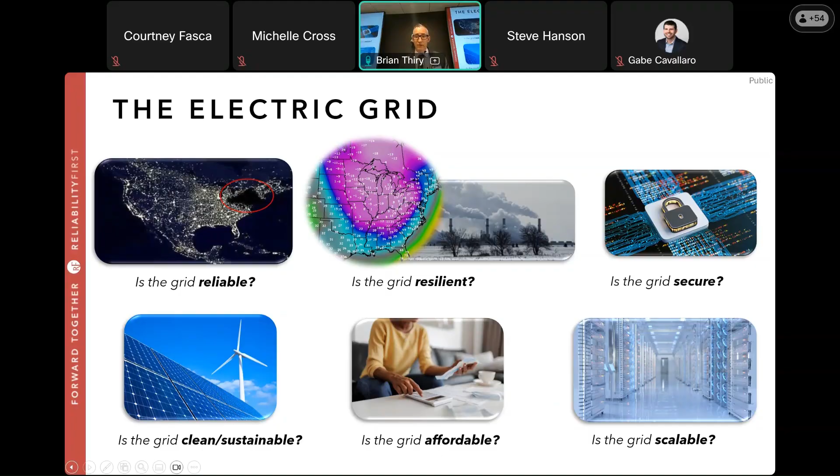The challenge we're facing - it's a lot of fun at dinner parties. Now I like to think that I am fun at dinner parties. People do like to talk shop about all these issues. You see it on TV, you see it in the news. Electric policy is at the heart of all of these things.

So that's my story, so let's get into this. This is the ERO risk framework. We actually had to submit this to FERC - like, what do you do here at NERC? And yes, we audit and enforce reliability standards, and yes, we do outreach.

Ultimately, our job is to take risk off the system, especially unnecessary risks. I mean, if UFOs invade and there's outer space aliens, I can't take that risk off the system, but there's a lot of risks we can take off the system.

So let's start at the top of this wheel: risk identification and validation. We are always monitoring and looking for risks, really through Diane's engineering department. She has two departments: one is event analysis and situational awareness, and the other is Johnny's engineering department, which you'll hear from later today.

You'll hear the word assessment a million times. Assessments are studies. Johnny is looking at what the grid looks like 5 years from now, 10 years from now. What if it's a cold day? What if it's a hot day? What if there's data centers? What if there's not data centers? What if everyone has an EV? We're running these assessments and studies, and those result in maps and studies so we can look at the risks of the future.

Also, our event analysis and situational awareness is looking at events—here in this country, overseas, internationally—so that we can learn from these things. Just by show of hands, have you heard of an event called the Iberian Peninsula Blackout?

Unfortunately, before then, I didn't know what an Iberian Peninsula was. I'm like, what is an Iberian Peninsula? Like, you mean Spain and Portugal? I'd heard of Spain and Portugal, but I didn't know of an Iberian Peninsula.

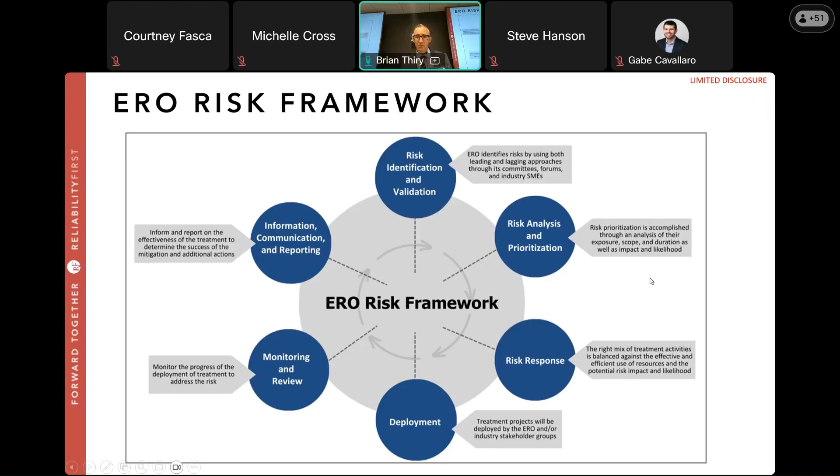Just as a heads up, if you're ever curious about what NERC and the regions do, there's this book called The NERC Rules of Procedure. It's a great book to read. It's only like 2,000 pages, right Kristen? Actually, I think I looked it up recently - I think it's 473 pages.

But it's all the things that NERC delegates to the regions. Like Michelle said, there's 6 of us regions. It's how we do our audits. Section 800 is how Johnny does his studies and assessments - these engineering studies we have to do. It's also how and when and why we analyze events. You see section 807, analysis of major events. And then section 1000 is about our situational awareness. Our situational awareness is really interesting.

We have some proprietary tools. I don't want to call them secret tools, but we have some tools that we could keep an eye on the grid, what's happening, regarding events on the system. And there's also a lot of really great open source tools that anyone can use.

If you don't already have it, download the PJM app, download the MISO app. You can go on real time, you can see what their reserves are, you can see what their interties are. There's really cool stuff - there's a thing called FNET, GridEye, shows the frequency all day, every day. Even things like social media feeds - you hear about events, you might be scrolling through X and say, oh, there's a blackout in Cuba, we should look into that. So a lot of really great open source tools, plus we have some proprietary stuff that gives us insights of what's happening in our footprint.

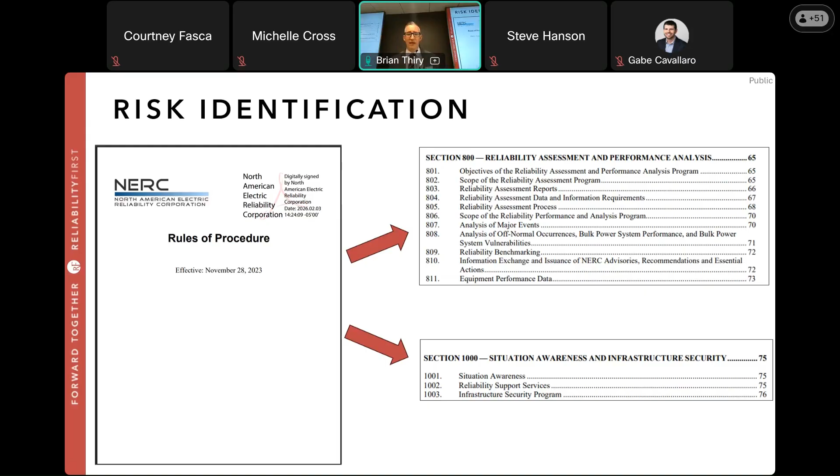So this is a Brian definition - you won't see this in any NERC literature. I call it 3 events: the lowercase e events, the capital E events, and capital EVENTS, like the stuff that you will read about in the news. Like I said, this is the unofficial Brian definition.

So lowercase events - just coming from a control room environment at First Energy, things happen all day, every day. Lines trip, whether it's a squirrel, whether it's a relay, whether it's an equipment failure, lightning, a car pole accident - things happen, these are little events. It's like you're playing Jenga, you pull the puzzle piece out, the thing don't fall. You don't want to pull the thing out because it might fall, but little events happen all day, every day.

We capture these things, we have all sorts of information. You might hear the word XADs - you're like, what is XADs? It's transmission data, generation data, misoperation data - hundreds and hundreds of events that come to us that we collect data on, like how reliable is that 138 kV line? How many times did it trip out last year? Why did it trip out? Was it vegetation related? Was it squirrel? Was it lightning? Was it unknown? Was it relaying? Was it an equipment failure? So these are the little events that happen all the time, all day, every day.

Not good, but these things happen. And guess what, for the most part the lights stay on. A generator trips, the lights stay on. The system is resilient to withstand these lowercase e events. We'll see how resilient it is coming up in the future with all the red that Michelle showed on the map, but right now we can withstand these lowercase e events. A lot of the data we collect there.

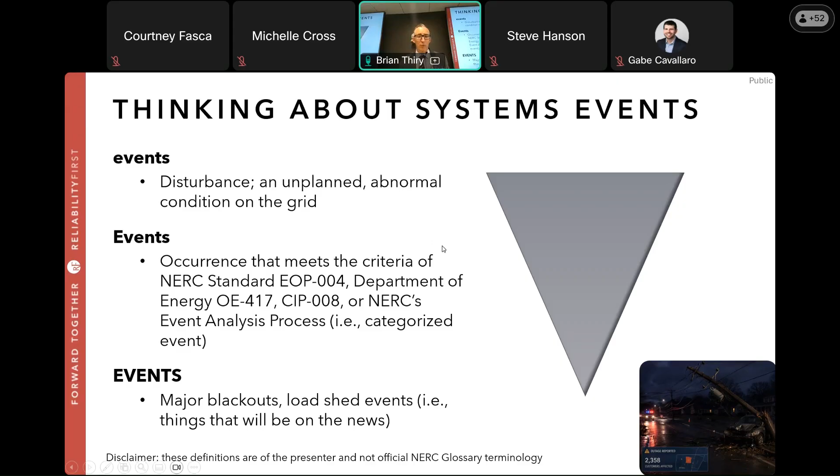And as we see our margins getting thinner and thinner, these things become more and more concerning. If you're interested in this kind of stuff, you go data. And I go, me too, I love that kind of stuff. Check out our State of Reliability Report. NERC releases this report every year, it's called the State of Reliability Report. It has every statistic you could possibly imagine.

So if you say, well, what are the trends, TADS, GADS, MIDAS, all these numbers, all these lowercase e events, are things going up or down? How many loss of load events did we have? How many EEAs did we have? All these types of things. The State of Reliability Report is a wonderful report. It has all the statistics of how we're doing, and it has it by interconnect. Here's how it's going in the Western interconnect, the Eastern interconnect, in our region.

Also, like I said, our impact report has specifically to the RF region, how many violations did Kristen have to process? How many late nights did she have with those 500 violations? 85% of them being self-reported, right, Kristen? Yes. How many events did we have in ReliabilityFirst last year?

We had 62 events, those were 62 reportable events. They could range everything from someone broke into a substation and stole copper, which happens, that actually mess up relaying. That's a reliability concern, along with, we don't like people stealing our copper. Also the severe misoperations, the EMS SCADA events, all those things we talked about today.

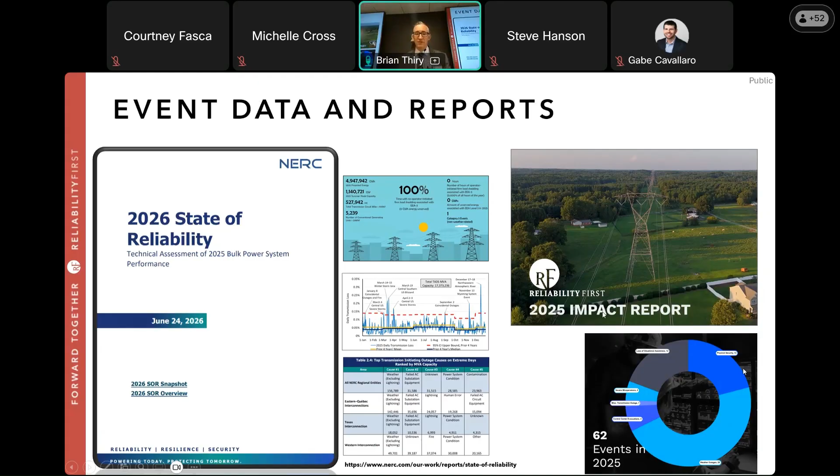So if you want to dig into the numbers and data, it's all there. These are things that we share with you at aggregate. So here's some of the big capital E events, and what do we...

Tree trimming, big deal. EMS SCADA outage is a big deal. Zone 3 relaying, mandatory standards, all the things we know and love today. We did all right for a little bit. We call it the golden era of reliability, maybe.

2011, then the Southwest outage reinforced the need for day-ahead studies. This was like my main job back at First Energy, running day-ahead studies of, dear Brian, based on what we know, how do we think the grid's going to do tomorrow? Based on what lines I have out, maybe for maintenance, maybe they're planned outages, what generation do I have available, based on what I think the weather's going to be, what the load's going to be.

Based on everything I know, how do I think the grid is going to perform tomorrow? Do I see any challenges? And if I see challenges, let's solve it today so that I'm not trying to solve it on the fly tomorrow. We saw a lack of day-ahead studies in that report that led to some real-time issues that were pretty much preventable.

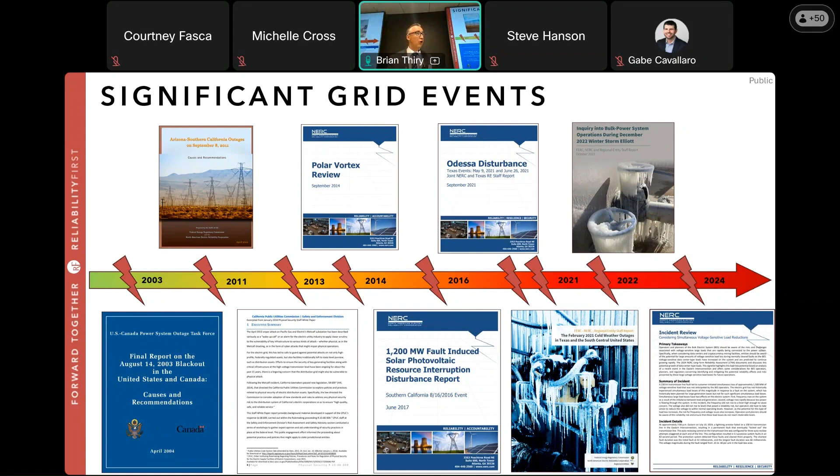So we are learning from these things. They are going to lead to new mandatory reliability standards. That's how we take this event information, and here's how we apply it into our work. Does that make sense? Yes, people are nodding - it's good.

Security events as well. We don't get too much into cyber and physical security today, but we could do a whole workshop on cyber and physical security. I already mentioned Stuxnet, operational stuff, and the Ukraine grid attack, but NotPetya - this was a supply chain thing. We were already...

Toilet paper on the shelf - our supply chain standard is like, what is the software in our stuff, or where are we getting our stuff from, and is it safe, and is it going to cause a security incident on the grid? Who are our vendors? Are our vendors vetted? All of those types of things. Are we getting things from countries that don't necessarily like us? And how do we know it doesn't have sensors in it and different things that we don't like? So that leads to supply chain standards. If you're familiar with the NERC standards, we would call that CIP 13.

SolarWinds - you guys remember this one? It wasn't that long ago. SolarWinds, we started figuring out they are in our systems. And we go, like, in my system? Like, I hope not - but they're in our systems. So now that leads to a new standard, it's called CIP 15, Internal Network Security Monitoring. Now there has to be a standard and guidelines for how we monitor what's in our system. What's our baseline? Did our baseline change? Is something in our system that we don't know and we don't like? And how do we get it out of there?

And then also from these security events, we learned from other infrastructures as well.

Colonial Pipeline ransomware, May 7th, 2021. It was a ransomware attack, and they didn't even attack the operational system, they attacked the IT system. But out of an abundance of caution, they shut down all the operational stuff because they didn't know how deep this ransomware attack went. So they shut down like 5,500 miles of pipeline. Once again, the lights stayed on, but these are things that are concerning. These are precursors, things that it's important we learn from and do things on.

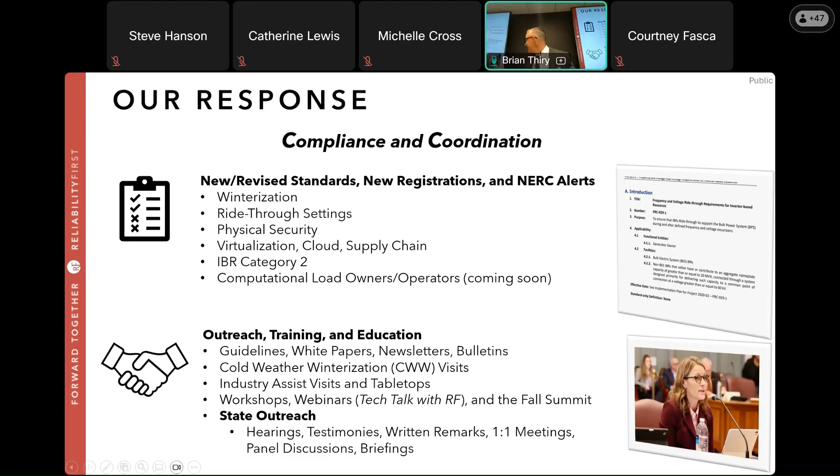Here's the bad news, though. We are entering high-risk times. Like I said, I wasn't very fun at dinner parties until recently. We're entering high-risk times, and we're starting to see precursors. It's like having little mini heart problems before the stroke - these are things we're very, very concerned about.

Michelle showed the map. The map is not a prediction - I sure hope it's not a prediction. I don't want to go back to caveman times. I'm not much of a hunter-gatherer. I'm much more of an email type person.

We're looking at things like energy emergency alerts in hours by region. Top left is PJM. You could pull these numbers yourself - they have a dashboard that shows when they're in these energy emergency alerts. We're seeing more and more hours in these energy emergency alerts.

My dumb analogy is like, I take my kids to the Grand Canyon and say, this is beautiful, you should see this. You should also stay away from the edge. How many hours did we spend on the edge? Hopefully very few. We don't like to live on the edge. We would like to see those numbers go down, not up.

In the State of Reliability report, they have this map called the one billion dollar weather and climate disasters. We are seeing more extreme weather across the Midwest and Mid-Atlantic, the wildfires, the extreme cold, the negative 20s. They said there's an El Nino coming. I feel like it's an SNL skit or something, but no, these things are very serious.

These things cause a lot of damage on our grid. Our grid is mostly outside. The natural gas industry has a lot of their stuff buried, but a lot of our stuff is out in the open on poles and towers, susceptible to weather. We had the Baltimore event, and we had a report on that. I could do a whole presentation on that.

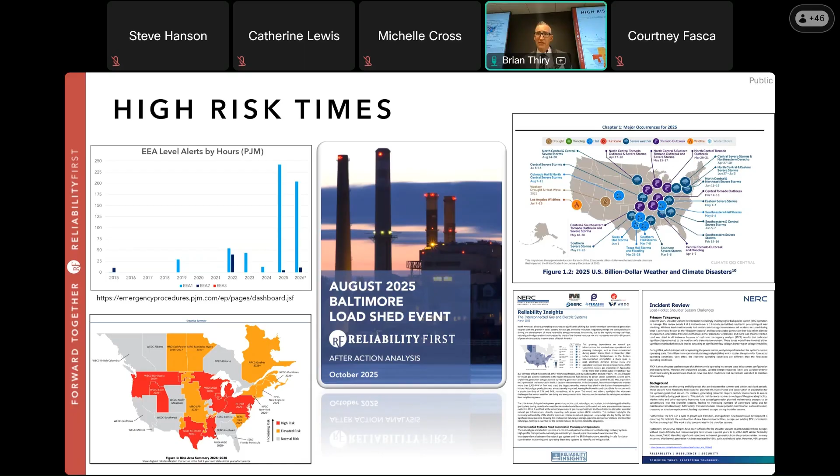So high-risk times, our work has never been more important, and most importantly, our collaboration with industry and policymakers has never been more important. So enough of me talking.

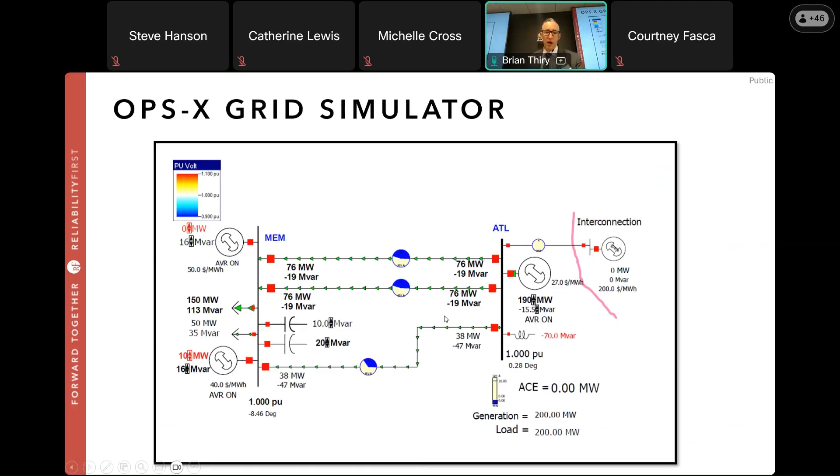We're going to have some fun. Listening to me talk is not fun, but we're going to go into the control room, metaphorically of course, and we're going to do what's called an OPS-X simulator. So give me one second, let me pull this up.

So we are in the control room. This is a very, very small mini grid, not the Eastern Interconnect by any means. But we are going to go into a control room and see, well, how does this work if you are the operator on the desk?

So first, if you've seen this before, I apologize, maybe you've seen it earlier at lunch, but you're in for a treat. Let's just do some orientation about what we're even looking at, because we didn't go through a month of training in the PJM training and NERC certification training. We are all now operators on the fly.

So the Eastern Balancing Authority, that is our grid connected to the rest of the world. So the grids obviously are interconnected. If I am not balancing, the rest of the world will help me balance. So that's good, I'm connected to the rest of the world, except for the purposes of today's drill, I want to balance. I don't want emergency power from them, nor do I want to be sending down power. Today I don't have a contract with them. They're good for reliability, but probably not the most affordable thing to do.

All right, the spinning wishbones, what are these? These are three-phase generators, this is making power. For today's purposes, we're going to try to keep this as simple as possible. I can give a whole lecture on megavars and voltage and why that's important.

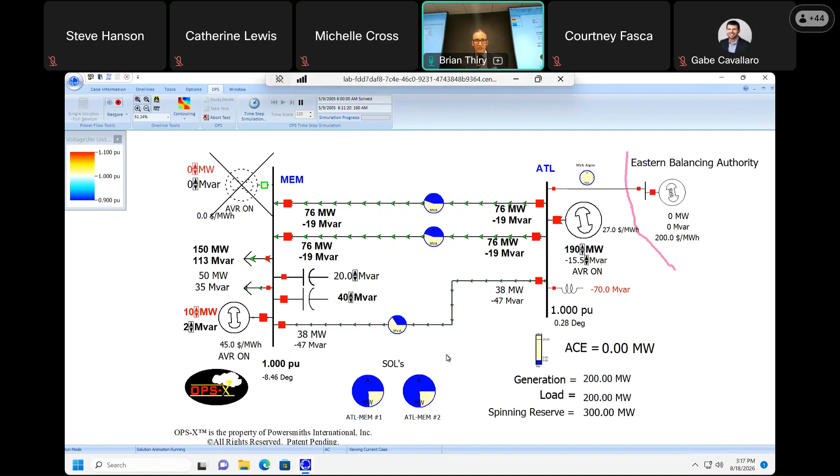I have a feeling Anne usually wakes up before 5 a.m., but today she slept in until 6:15. She wakes up and turns on her coffee machine. Oh my God, Diane, look, it went up from 150 to 162.

So my ACE is negative. Okay, easy peasy, I have a dispatchable generator, I'm going to ramp it up. I want to keep that ACE plus or minus 10. You see, I'm over-generating by about 3 megawatts. I have 215, I need 212. The extra 3 get absorbed by, call it the rest of the world. Keep that ACE plus or minus 10. I'm in pretty good shape.

So at 6:30, more people wake up. You know, it's kind of like me, I like to sleep in a little bit. Usually I'm up by 6:30.

Looks like it's going to be kind of boring. You're just going to click that up arrow. Yeah, you're right, just click this up arrow. We'll see what happens.

But you know, this isn't my first day on the desk, and I'm kind of thinking I've got a bad feeling about the day. In fact, I have such a bad feeling that at 7 o'clock something very bad's going to happen. I just don't know why. I can feel it in my bones, I can feel it, I'm just so nervous. I'm telling my boss, I just have a bad feeling about the day. My boss says, Brian, it's fine.

It's fine. All right, so 240, load's 237, everything's going okay so far. I'm using this nice cheap generator. Hey, if I lose a line, I'll go to 91%. That's okay, I'm fine there. My line's at about what? 53%. Okay, that's good. If I lose one, I go to 91%. All right, I'm doing all right.

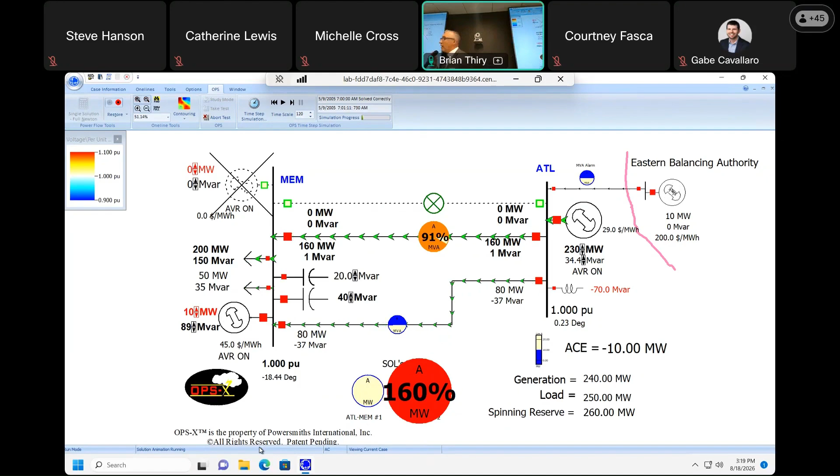Well, the operator doesn't know. All they hear is this noise in the control room. They go, uh-oh, they look up, they go, what happened? They get an alarm: I lost that number 1 line. I don't know, it looks nice outside. It could be lightning in the area, I guess. Was it a squirrel? Was it equipment failure?

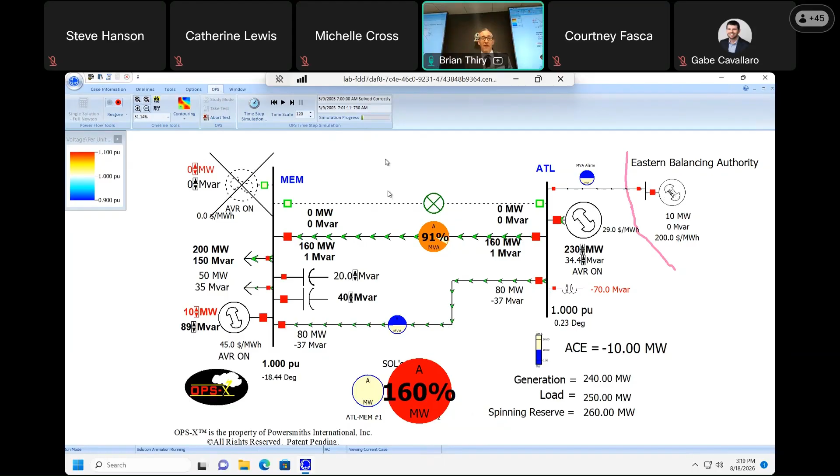I don't know, I will have to send out Michelle to go check on it. And I did pause it, just like I paused it. Michelle went out to the substation. I go, Michelle, what happened? She goes, oh Brian, it's nothing, I'll have it fixed in 45 minutes. Michelle, that is awesome - usually in my experience on the desk, it wasn't fixed in 45 minutes.

But Michelle's really good at her job, so she's going to get this fixed in 45 minutes. But for those 45 minutes, I have a headache. And here's my headache: line number 2 is at 91% - good, right, no worries. Line number 3 is at 50%, that's good. My ACE is at negative 10.

Okay, fine, I can ramp that up. Okay, my ACE is at 0, that's good. But my contingency is saying, hey Brian, listen, if you lose another line, the other line is going to be at 160%, which means it might come out of service. Then you might have a blackout. So that would be very, very bad.

So I can't live with that, because what are the chances I lose another line? I don't know, why did I lose the first line? If these two lines are near each other and it's squirrels, maybe there's this squirrel parade. Maybe those lines are near each other and there's lightning in that area. Or maybe we're under attack from someone who doesn't like us, or doesn't like me. So I don't know, I can't risk it, not even for 45 minutes.

I can't risk it, I've got to do something. So I've got to get that 160 down to less than 100. You guys have any thoughts of how I would do that? I mean, I could just shed the data center - some people might like that. But outside of shedding load, what do you think I should do?

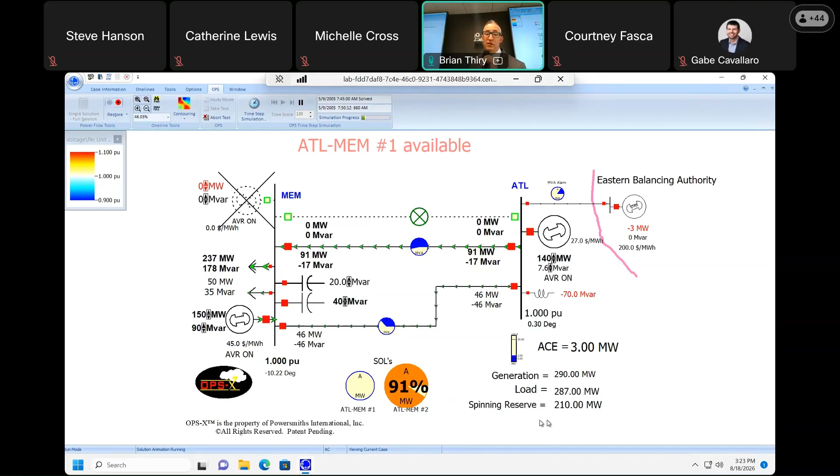Oh, it's available, Michelle's done. Michelle goes, Brian, you could have the line back. Good, I got the line back. Cool, I could actually start using this cheap generator again. So let me ramp up this cheap generator, I can ramp this one down a little bit. Let's go up to like 200. I can ramp this one down to 100. Hey, we're doing pretty good.

These lines are at 47%. If I lose a line, I'm at 80%. The system is reliable, it probably could squeeze a couple extra megawatts out of this one on the right, but just want to kind of play it safe today. It's already been a rough morning.

812. It's only going to get hotter throughout the day, so this load's going to go up. Remember, I said at 150, now we're over here. So you ramp this up a little bit.

All right, so my contingency is 85. My line right here is at 50%. Doing okay. Maybe today won't be so bad after all. What do you think, Diane?

Oh, I think it's really bad. Diane worked in the control room too. She knows a bad day when she sees them. She knows, there will be signs.

All right, so my contingency is 90%. I'm monitoring the system, I'm going to put on these cap banks a little bit more. I can do a whole lesson on voltage, but not today. You just don't have enough time.

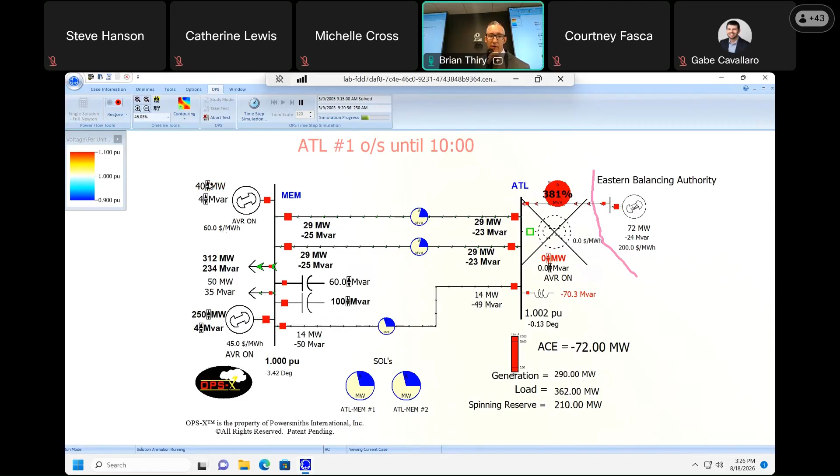I'm going to ramp this one up as high as I could go, up to 250. Don't go much higher than that. Let's start ramping this one up because my ACE is still negative 90. Oh boy, better click faster - I'm going to get that score because I'm clicking faster.

Oh boy, okay here we go. Expect this - ooh, I didn't. It's a little peaker today, a little expensive, $60, but here I am.

Hey, this unit's out too. Michelle is so good at fixing things. I mean, usually these units trip out - maybe it's a tube leak. It might be out for like 4 hours, or it could be out for 2 days. But Michelle goes, Brian, I got you. It's remarkable - I mean if you're on the desk, if Three Mile Island or Davis-Besse tripped out a nuclear power plant, that thing could be off for 2 weeks.

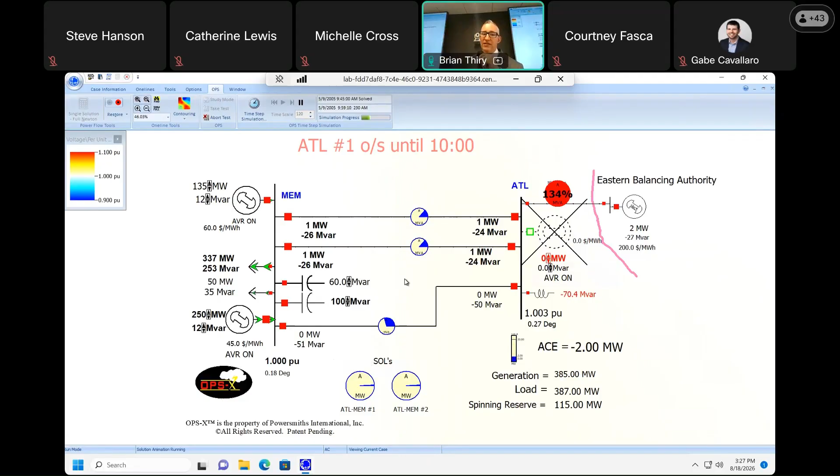You know what's funny though is that when that unit's off, I'm actually making power right by the load. All the power is very close to the load, so these lines don't have a lot of flow on them. That's actually kind of good reliability - having generation near the load. Yes, transmission is good to move power, but also we don't have a lot near the source.

So, all right, got the unit back online. Once again I got to rebalance the system. I can ramp this one up - let's try to do it the easy way, clicking the top. I just fire this up to 200 megawatts. Okay, now 5.

So we are back in business. We're using the cheap generator at - oh, it actually went up on me, these market prices - $29 now. The one on the bottom left, 45. I turned off the expensive one, so I'm back in business.

But let me talk a little bit for a second about spinning reserves. Spinning reserves are very, very important to system operators. These are essentially your online headroom on your generators.

So this generator is at 200. What does it go up to? You guys remember, 250, thank you. So how much headroom does it have? 50, yes, 250 minus 200. This one also goes up to 250, it's at 210, so I got 40 of headroom there. So right now I have 90 megawatts of spinning reserve - that's 90 megawatts of headroom.

These are really important things as system events happen, as generators trip offline - they have something up and running with some headroom. If these things were popped off, they wouldn't have any.

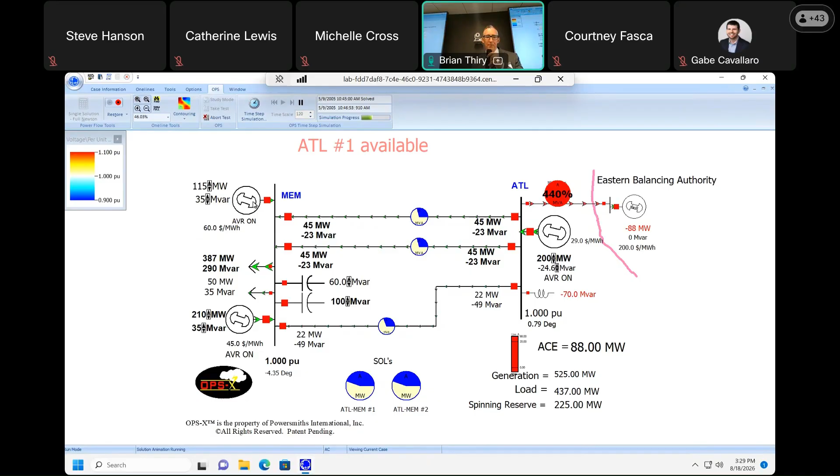Watch this - if I bring on this one, and let me just make this one the minimum. Give me a second here, I'm gonna get a bad score, I'm not clicking fast enough. Let me go to 10. If that's at 10, I just added 240 of headroom.

So now my spinning reserves are high. In the PJM world, they want to keep spinning reserves at 1.5 times their single largest contingency. So in this simulation, I think the scoring system wants me to keep my reserves at, I think, like 100.

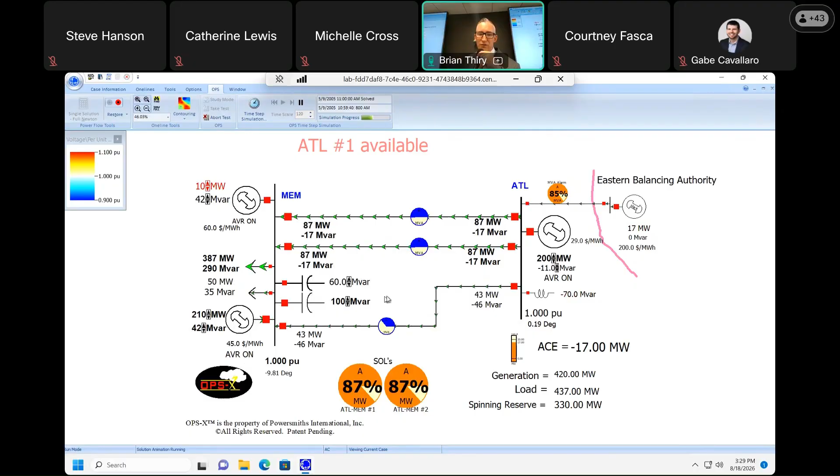Oh, what happened now? Uh-oh, I lost that natural gas generator. So I have to start ramping - let's try to do this the easy way. I'm under-generating by 185.

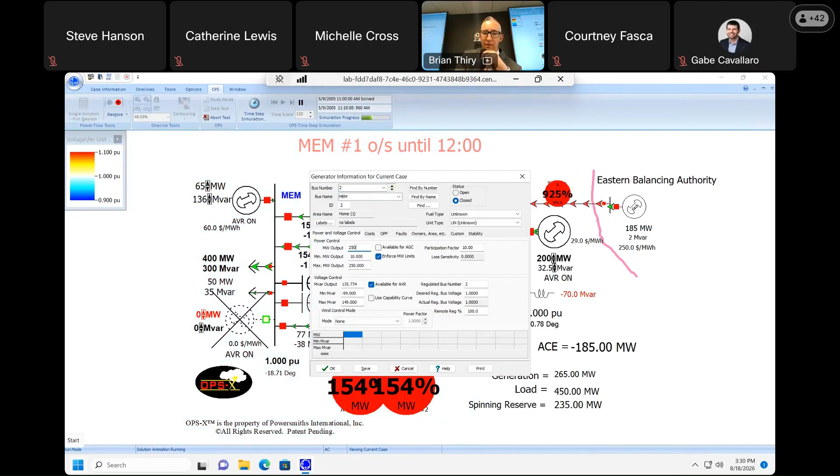$54.50, my ACE at 0. Not having a lot of room - I got 50 on my generator here at Atlanta. I have no headroom on my generator here at Memphis.

Luckily Michelle's on the case again, she says she could get this back to me by noon. But imagine if it was going to be out for 3 or 4 days - I'm in a very, very bad situation, I got very little reserves.

And at this point, other than just going negative on my ACE, there's no way to get more reserve. There's no other generators I can bring on. One trick I could do is I could shed load - I could say, hey, goodbye data center, you're out.

Then hence I'm over-generating, I can ramp this down and I can get my reserves up. I mean, that's what we call a rolling blackout or load shed, or maybe in some instances the data center has backup generation it can flip to. So that's a way I could get my reserves up.

But if I leave that on and I have to have this up at 250, I am really, really running out of reserves here, spinning reserves. So I'm at a very, very bad situation where if I lost another unit, I'm talking about rolling blackouts.

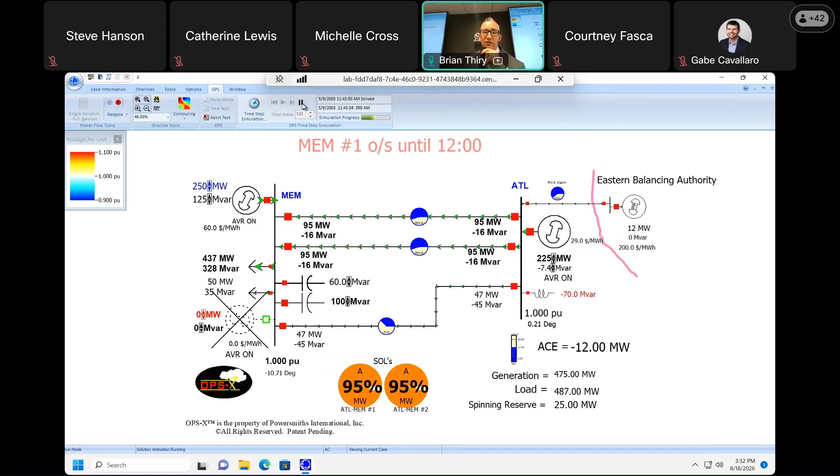So essentially, you could play out this OPS-X scenario all the way to 6 p.m. The load will go up. You've already gone up 150 to 437. I think by the end of the day, it's at like...

But you see as things happen, how the operators respond and react. So that's why as we integrate data centers, IBRs, generators, we get all these risks. I think someone, either Diane or Michelle, said at the beginning, it's really like that combination of all these risks together, how it plays out in real life.

So we talk about, like, I'm looking at all these tools and my dispatching and my ACE. What if my EMS wasn't working that day? What if I didn't know I was blind and I couldn't respond and react to these problems? You can see how these risks could really, really compound and cause reliability challenges on the system.

So the OPS-X simulator is a lot of fun. If you ever want to try it out, let me know. I could let you play. We can see what your score is, and if you can beat my high score.

But at least I hope this shows you a couple of things about what is a dispatchable resource, and then just some of the challenges we have. Like, suppose we said, hey, that oil peaker in the top left corner, we want to retire that. We have a renewable mandate and we want to replace that with solar, wind, and battery.

Well, how does that work in an operating environment? Or suppose we want to add an SMR, or suppose we want to have a nuclear power plant that runs at that same megawatt threshold all day, every day, it doesn't go up or down. All these things have to work in tandem for us to keep the lights on. So the operation simulation really brings these things to light.